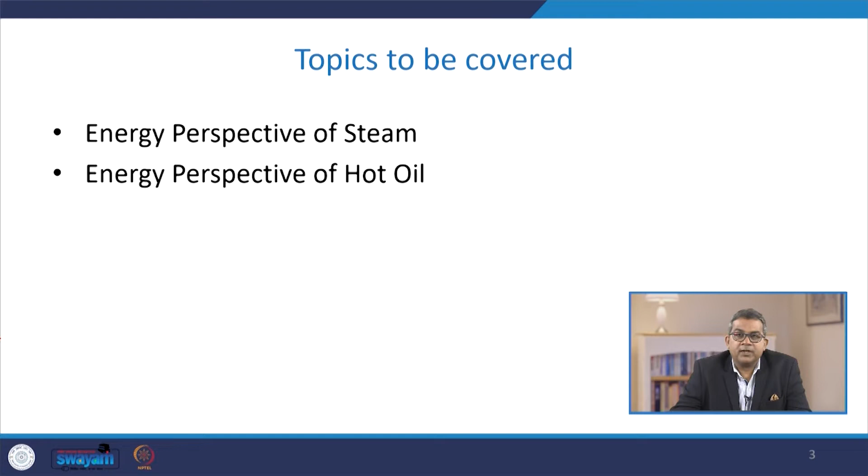And then we studied the concept of heating units, in which we analyzed how we can give major importance to the load of any heating unit, because we cannot overlook the importance of this electricity requirement or heating unit requirement in due course of time. Now, in this particular chapter, we are going to discuss the energy perspective of steam. Remember, this is an introductory aspect, and energy perspective of hot oil.

Now, steam is widely used in various industries for heating purposes when moderately high temperature is required. There are so many parameters associated with this moderately high temperature concept. It also depends on the pressure aspect, on various other allied units like steam traps, condensers, etc., and the steam distribution network, because sometimes the pressure may drop during steam transportation or steam distribution.

So the question arises: what are the advantages associated with steam? Steam has plus points as well as certain negative points, and above all certain limitations. So let us take some of the advantages of steam. Being pressure dependent, the temperature of the steam can be precisely controlled for heating operation. Your regular thermodynamic laws always prevail in this condition. Sometimes this is beneficial and sometimes disadvantageous. We will discuss this aspect during the study of steam in detail.

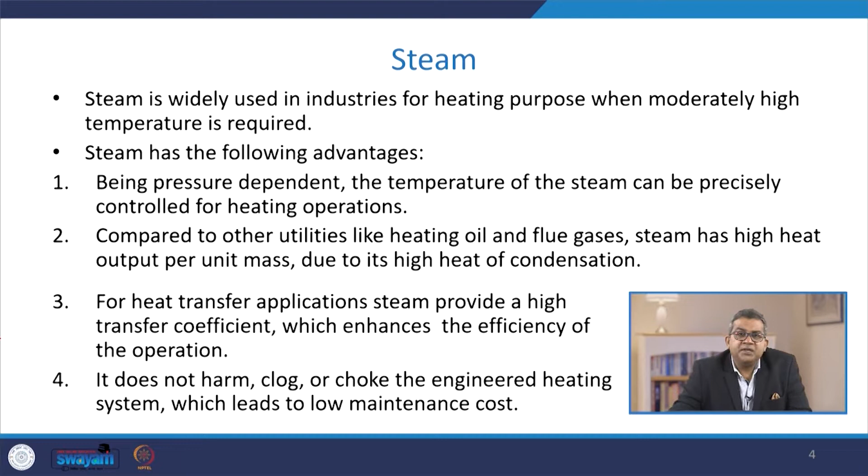Compared to other utilities like heating oil and flue gases, steam has a high heat output per unit mass because of the latent heat of water, that is, due to its high heat of condensation. Another advantage is that for heat transfer applications, steam provides a high transfer coefficient, which enhances the efficiency of the operation. This is purely a heat transfer phenomenon. Above all, it does not harm, clog or choke the engineered heating system, which leads to low maintenance cost.

Other advantages: it's non-flammable and non-toxic, because the basic raw material for generation of steam is water, which is invariably a non-toxic substance. You can easily visualize if any system leaks, because the vapors come out from that particular segment. So you can easily determine where the leak is, where the problem is, which function is malfunctioning.

Steam generation is a well researched field, and system and workforce requirements can be easily handled. We always talk about the steam table, etc., during our initial days. Everybody knows the integral parts of steam, how we can control it, what the latent heat is, the pressure and temperature relationship, etc. So steam is well researched, well studied. We will have a detailed discussion of steam generation, steam control, steam distribution, condensation, steam traps, safety devices, etc., in the upcoming lectures.

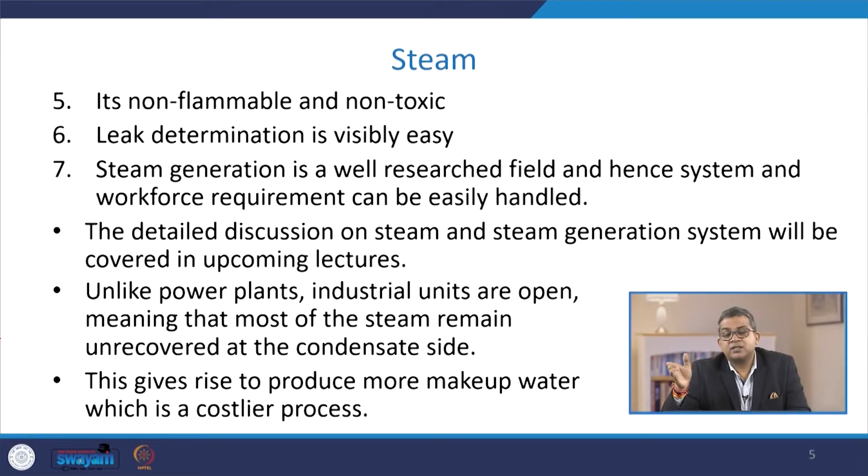Remember, while generating the steam, you have contributed a lot of capital expenditure with respect to the water conditioning. So the condensed water can again be utilized in the same steam cycle. So you need to give proper attention to all these aspects. Otherwise, you may need to produce more makeup water, and it will be a costlier affair, and again it will ultimately contribute to your product cost.

Because in chemical engineering we have a wide spectrum of industries, every industry has their own guidelines to distribute and categorize the steam. Broadly we can classify it into three different forms. One is the high pressure steam, which is nearly 40 bar, condensate temperature usually 250 degrees Celsius. Then medium pressure steam, 20 bar, and the condensate temperature is nearly 212 degrees Celsius. And the low pressure steam, that is 3 bar, and the condensate temperature is nearly 130 degrees Celsius.

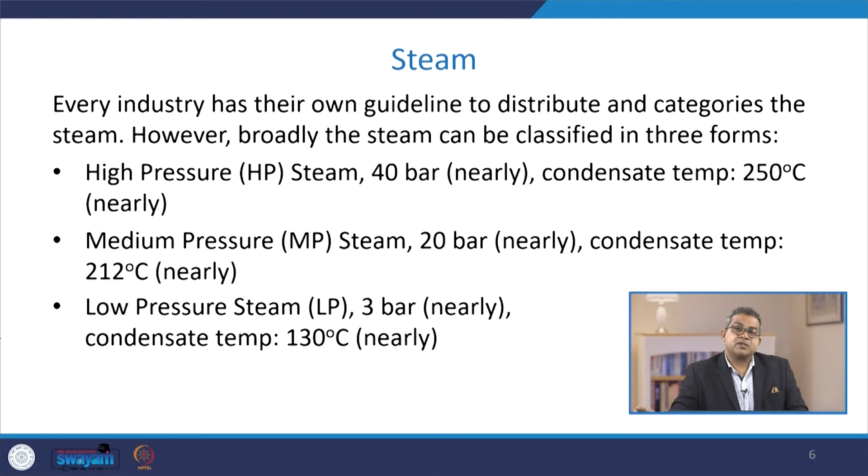We can classify steam at a more microscopic level, but these are the broad classifications. Based on this classification, you can design your own steam generation system according to how much requirement there is on the site. You may design your own distribution network. You can even adopt the policy of a centralized boiler system to produce the steam, or a discrete steam generation system at the place of work.

Coming back to the classification, steam having a pressure higher than 40 bar can be achieved using demineralized water as a feed. But latent heat recovery from such a very high pressure steam system is practically not feasible. So while designing the distribution network, you have to look into this aspect. Heat recovery is a very catchy term, but you have to look at the engineering aspect of whether it is economical or not.

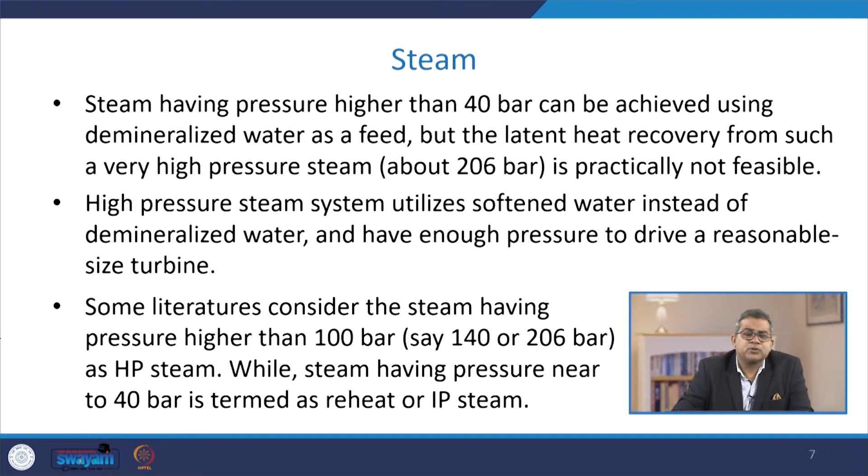High pressure steam systems utilize soft water instead of demineralized water and have enough pressure to drive a reasonably sized turbine. Some literature may consider steam with pressure higher than 100 bar, say 140 to 206 bar, as high pressure steam, while steam near 40 bar is termed reheat or IP steam. So it all depends; there is a broad classification scheme. In all cases, steam with pressure near 40 bar is considered reasonable and effective for heating and cost recovery purposes.

Here the steam at 40 bar pressure is defined as high pressure steam. This high pressure steam is utilized for process heating and for moderately long distance transportation. Remember, for long distance transportation you have to look at the pressure drop, which may occur because of condensation and a variety of reasons. Medium pressure steam is used for intermediate heating and is usually considered effective for heat recovery from the plant using pinch technology. We will discuss this later on.

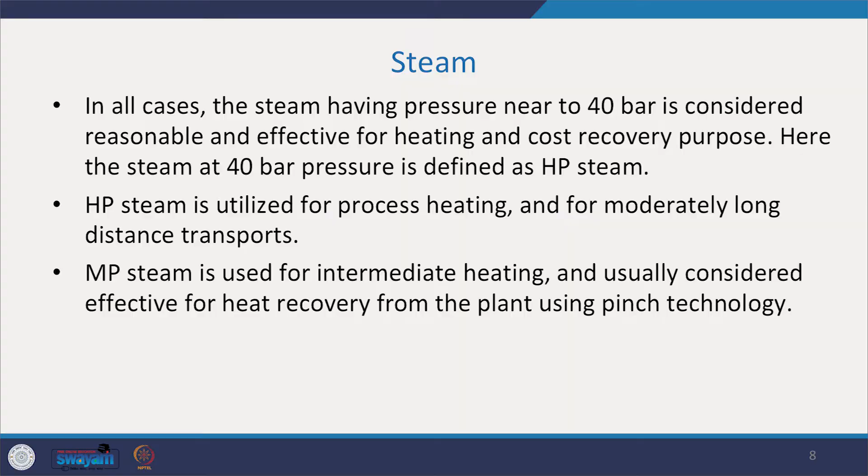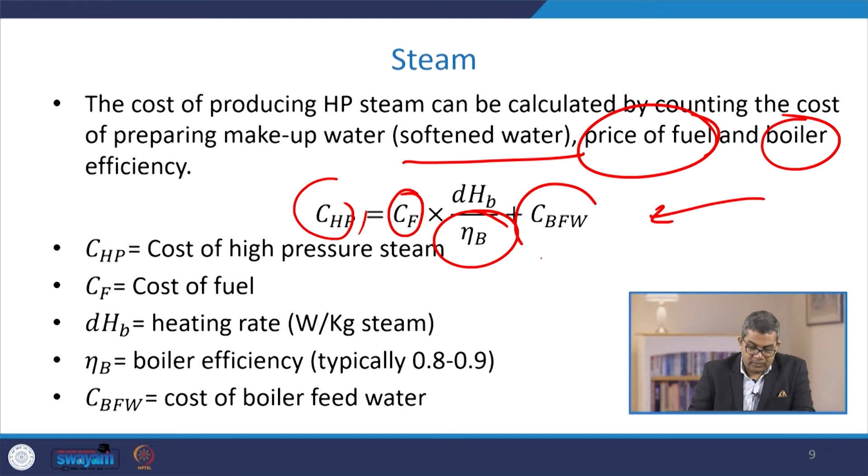The cost of producing high pressure steam can be calculated by counting the cost of preparing makeup water, water softening, price of fuel and boiler efficiency. Again, the rule of thumb is that you cannot make a system 100% efficient. This simple mathematical formula gives you an idea of the cost of high pressure steam. The cost of high pressure steam equals the cost of fuel, heating rate, then the boiler efficiency, which is a very important affair, then the cost of boiler feed water. Conditioning the water to the desired level is a very costly affair.

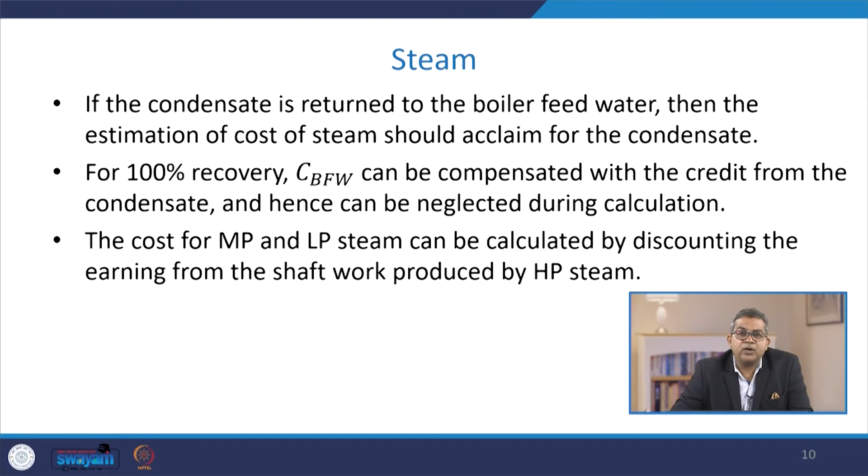If condensate is returned to the boiler feed water, then the estimated cost of steam should be credited for the condensate. Say for 100% recovery, the cost of boiler feed water can be compensated by the credit from the condensate, hence it can be neglected in further calculation. The cost of medium pressure and low pressure steam can be calculated by discounting the earnings from the shaft work produced by the steam.

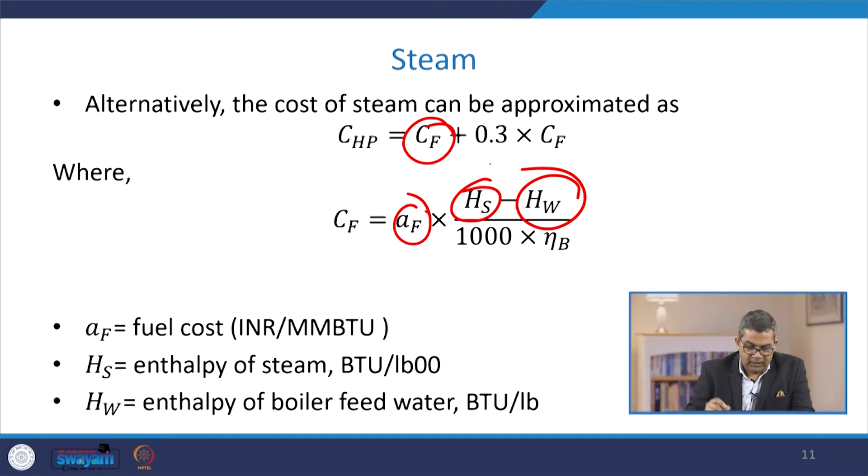Alternatively, the cost of steam can be approximated as CF plus 0.3 CF, where CF is the fuel-based cost, with AF the fuel cost in Indian currency, HS the enthalpy of steam in BTU per pound, and HW the enthalpy of the boiler feed water. We have given a couple of mathematical relations, so let us take an example.

Calculate the cost if a boiler is producing steam at the rate of 10 tons per hour with a fuel cost of 350 rupees per MMBTU. The enthalpies of steam and water at 6 bar and 158.8 degrees Celsius are 2756.14 kJ/kg and 670.5 kJ/kg respectively, and take the boiler efficiency as 0.88. Go back to the formula: CF equals AF into (HS minus HW) divided by 1000 into the boiler efficiency. We know that 1 kJ/kg equals 0.43 BTU per pound.

Now here we know that AF is 350 rupees per MMBTU. So 350 multiplied by 2756.14 minus 670.5. Now see, 1 kilojoule per kilogram is equal to 0.43 BTU. So it should be multiplied by 0.43 divided by 1000 into the boiler efficiency, which is given in the problem as 0.88.

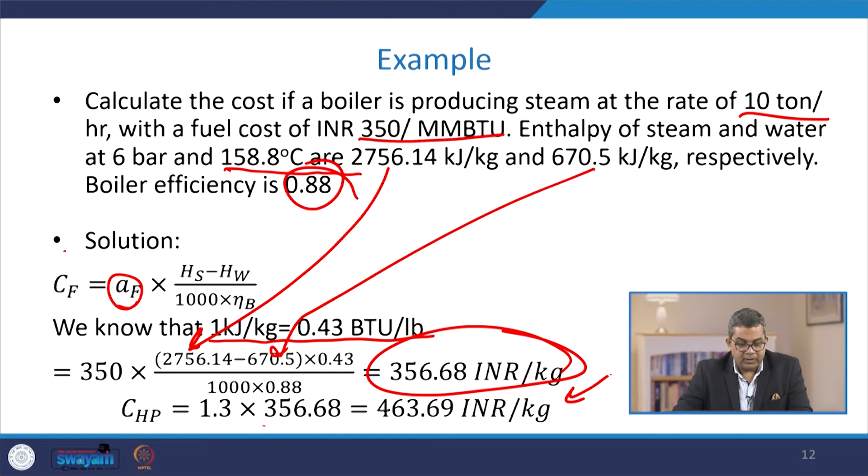So it comes out to be 356.68 rupees per kilogram. Now CHP is equal to 1.3 into 356. It comes out to be 463.69 rupees per kilogram. So, we can calculate the annual cost by considering the generation of 8,000 hours per year. This is a rough estimate; a boiler usually works 8,000 hours per year.

So, the total steam generated is 8,000 hours per year multiplied by 10 tons, which is 80,000 tons per year, and we multiply it by 907.18 kilogram. So, the total cost per year would be 80,000 into 907.18 into 463.69; it comes out to be 3.36 into 10 to the power 10 rupees per year.

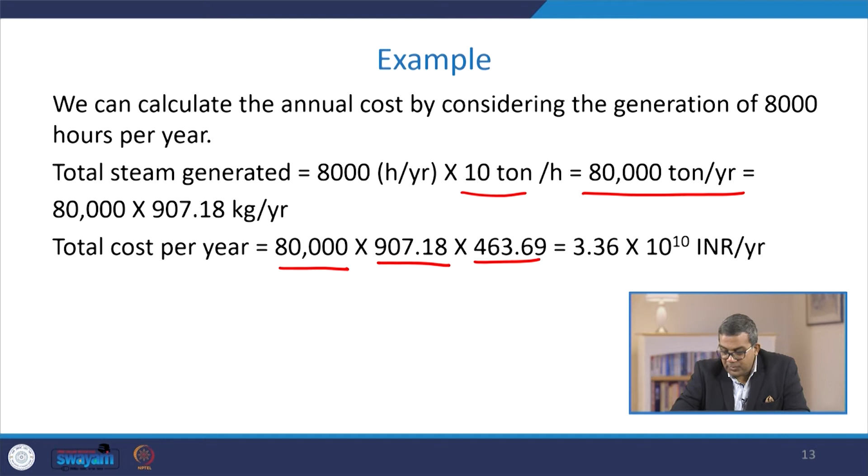Now, let us take another example of hot oil. Hot oil is a very good heat transfer media. So, when multiple moderate temperature heating is required in a particular system, it is economical to have a hot oil in the process. This is sometimes termed, as I told you, heat transfer media or heat transfer fluid. They generally consist of mineral oil or any other high heat capacity fluid.

So, nowadays, because of technological advancement, we are having a very big basket of hot oils, so we have ample choices. We will discuss in the subsequent lectures what are the prerequisites for any mineral oil to be used as a heat transfer media or heat transfer fluid.

So, hot oils usually work within the temperature range of 50 degrees Celsius to 400 degrees Celsius. Now, somebody may ask why we are not using steam, because water is available in abundance. See, if we go beyond 250 degrees Celsius with the steam system, then it creates a lot of problems and a lot of working or capital cost is needed for this type of steam generation, and that is why hot oils offer a very good, economical choice.

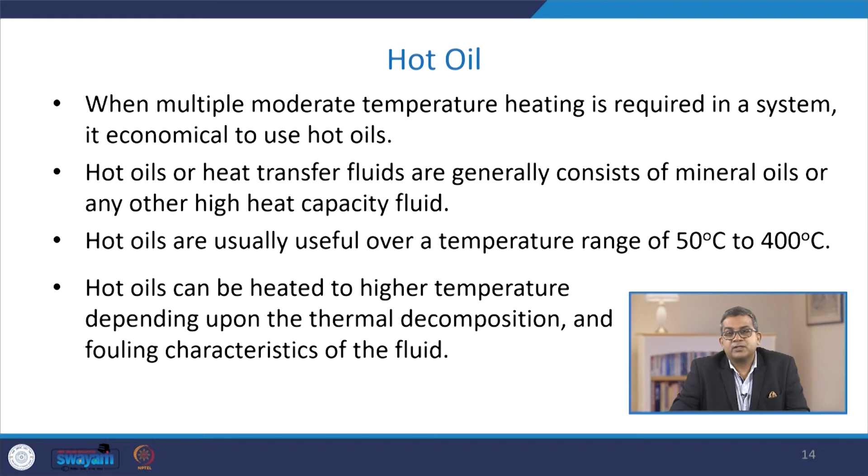Now, these hot oils can be heated to higher temperature depending upon the thermal decomposition and fouling characteristics of the fluid. So, these oils have limitations with respect to composition, formula, molecular weight, etc. And sometimes they may get decomposed to give some low heat products, and it may be a very dangerous affair if we are not using the suitable heat transfer media.

For multi-point heating application, it is not feasible to incorporate multiple fired heaters. It is sometimes uneconomical. Therefore, these hot oils are circulated throughout the system using a single large sized fired heater for heating the fluid, keeping in view all the limitations associated with these hot oils.

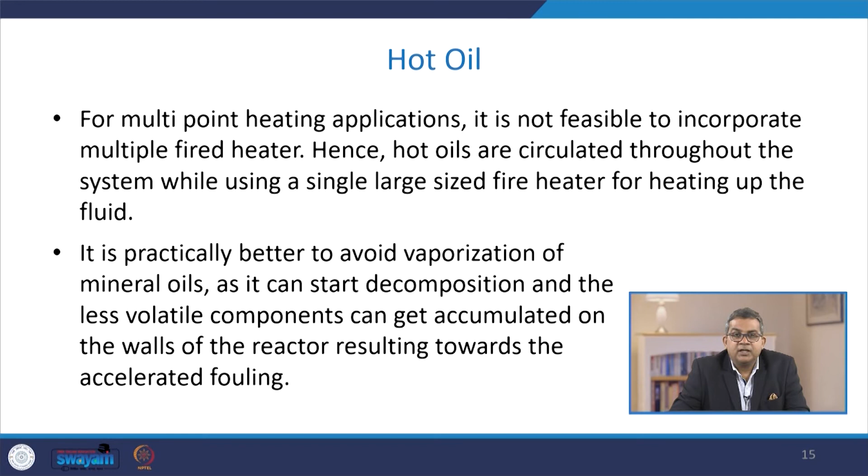Now, it is practically better to avoid the vaporization of mineral oil. There are certain limiting factors with respect to temperature and pressure. If we violate those conditions, then it can start decomposition, and less volatile components, as I discussed, can accumulate on the walls of a reactor, resulting in accelerated fouling, and sometimes it can pose a safety hazard.

Apart from this, the cost of operation is usually equal to the cost of oil plus the cost of heating. So, if you are not having any chance of a leakage or any other thing, then you can minimize the cost. In the longer run, the cost of mineral oil can be neglected as the major cost is related to heating the oil.

But simultaneously, you cannot overlook the fact that this mineral oil is being repeatedly used, and if any unsaturation is there, it may get polymerized. So, you need to find out up to how many cyclic operations you can carry out with a single set of mineral oil. Now, if a pumped liquid heating system is utilized, then the operating cost of the pump should also be included in the overall cost. Ultimately it contributes towards the cost of utility.

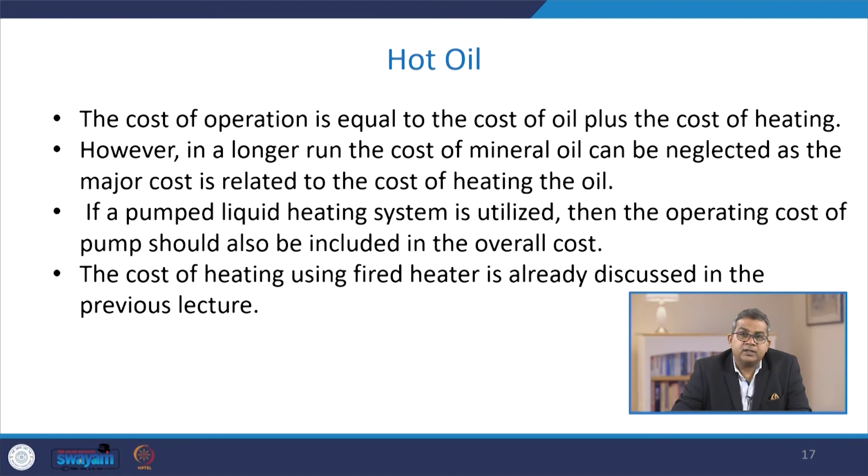The cost of heating using a fired heater we have already discussed in the previous lecture. So, by this we are coming to the end of this particular lecture, and if you are looking for more detailed knowledge about this particular segment, you can have a look at this reference.